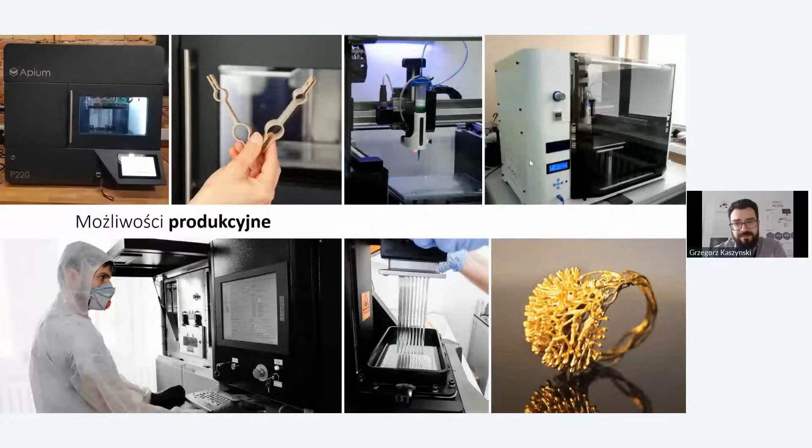You can visit us in Warsaw Cambridge Innovation Center to talk about prototyping and new technologies. And we are growing fast. Last year we were at 48th place in Deloitte Technology Fast 50 Central Europe. And our main job is to promote rapid prototyping, new technologies. We are in a lot of webinars, applications, and materials. We have our own production facilities. We have our own research team and development team.

And what is really important, we are not your standard sales company. Our backbone is research and development. We have different projects ranging from biotech to engineering to special materials, mostly around rapid prototyping. In total, we have more than 20 million zloty in fast-track projects currently running in our company.

We have our 3 main areas that are divided between Sygnis Biotechnologies, Sygnis New Technologies, and Sygnis Nanotechnologies. But what is really important for us is that it is one company. People are working together, exchanging ideas and helping each other. So we can use industrial applications from Sygnis New Technologies in Sygnis Biotechnologies and help our users in biology with solutions that we devised for industrial customers.

In biotech, we focus on 3D bioprinting. As I said, the core for us is additive technologies, microscopy, 3D tissue models, and omics. In nanotechnology, we go for ultra-high vacuum and nano fabrication with Femtika. Again, not only subtractive, but mostly additive technologies and solutions going down to hundreds of nanometers. And the main focus of the company, Sygnis New Technologies, is rapid prototyping and 3D design and engineering. We are working with several different technologies.

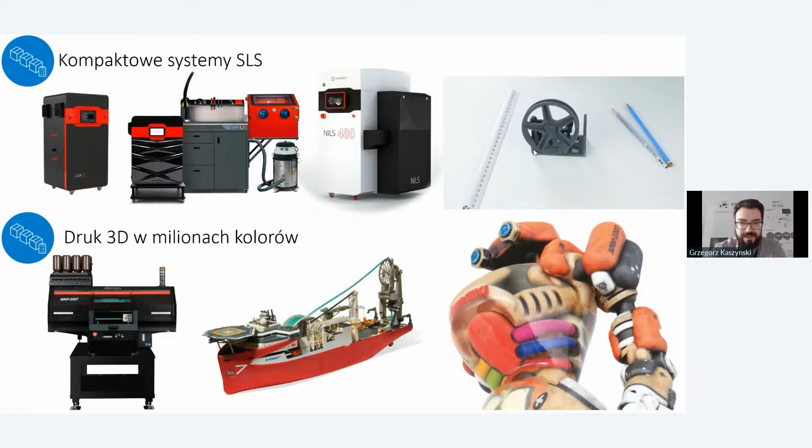Our pride is our national company, Sinterit; we are working with SLS techniques. And we are working also with a new player on the market, Mimaki. We can print engineering devices with Sinterit. We can print full color systems. This, what you can see on the screen, is from the printer. It is not painted.

We are working also with resin printers in different applications, from consumer versions to highly sophisticated industrial solutions from DWS. We are focusing on FDM from industrial applications, special materials, up to, for example, this is a very good example of cooperation, printing implants. So this is between industrial applications and biotech applications, but we are also working with customers to directly 3D print implants with PEEK materials.

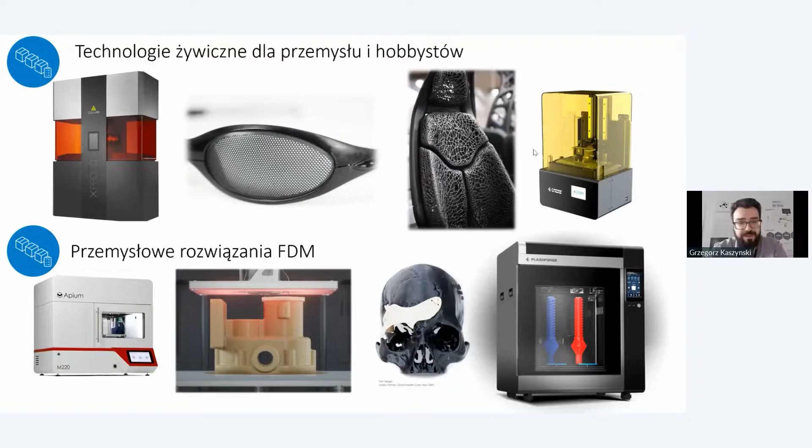Also, of course, we are working with metals, and in this area we are working with Aconity and InssTek. And from InssTek you will hear about their amazing technologies in a second. And of course, we are focusing on rapid prototyping and low volume, low scale production. So we have our own machines, our own designers, so we can prototype, produce, and help you with all techniques. Anything that can be rapid prototyped or 3D printed, we have it covered.

Today's topic is multi-material manufacturing. With technological advances, there's a growing demand to use materials in various ways and combinations. I would like to talk about the whole process of applying multi-material manufacturing to the industrial environment, from material research to practical applications.

As you can see, I've divided my presentation into 5 parts. The first 2 parts are about DED technology, which is one of the 3D printing technologies, and how it can be applied to material research. The later 3 parts will focus on processes that we need to apply this research to actual industry. After that, we will cover examples of multi-material manufacturing applications for each industry.

Before we get into it, let me introduce our company, InssTek. InssTek was incorporated in 2001 and specialized in metal 3D printing business using the DED method. We are a technology-based company and have our own technologies in various fields, from hardware to software, such as powder feeding, optic design, and 5-axis CAM.

We are based in the middle area of South Korea with 45 employees. We specialize in manufacturing AM machines and AM service, such as printing, coating, cladding, and repairing. We are working with many global partners and customers in Europe, America, and Asia.

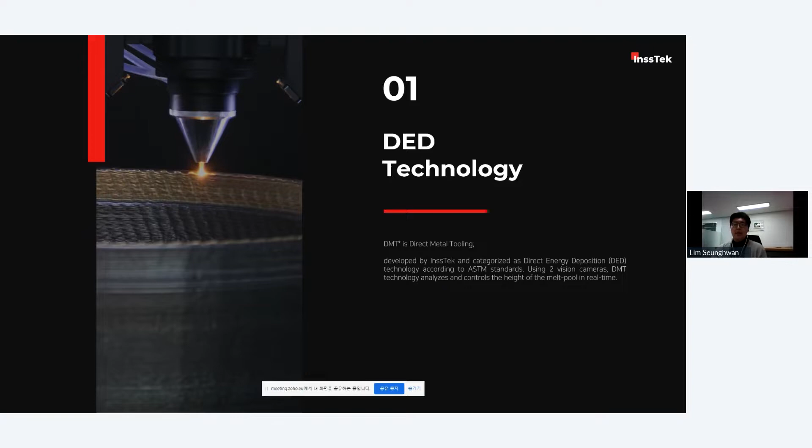First, I will introduce DED technology, which is one of the 3D printing methods. After that, we will look at the many advantages of DED technology. DED stands for directed energy deposition and is a 3D printing method that uses an energy source to make a pool of molten metal. To this molten metal pool, feedstocks are supplied and solidified as one part.

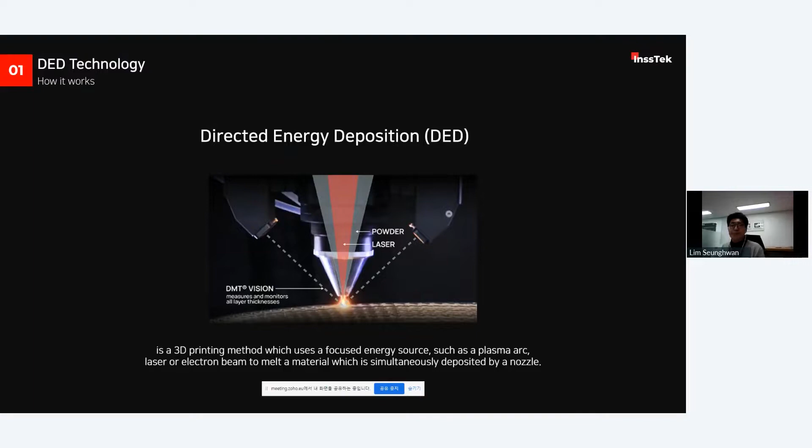DED technology can be classified according to the type of energy source and feedstock. Metal feedstocks are used in forms of powder or wire, and as energy sources, laser beam, electron beam, plasma, arc, and sometimes kinetic energies are available. So there are many companies serving DED technology with various combinations of feedstocks and energy sources.

Among them, InssTek uses a combination of metal powder and laser beam. As you can see in the picture on the left side, laser and powder are focused to one point through the nozzle, and two vision systems watch the melt pool and control the process parameters for better quality.

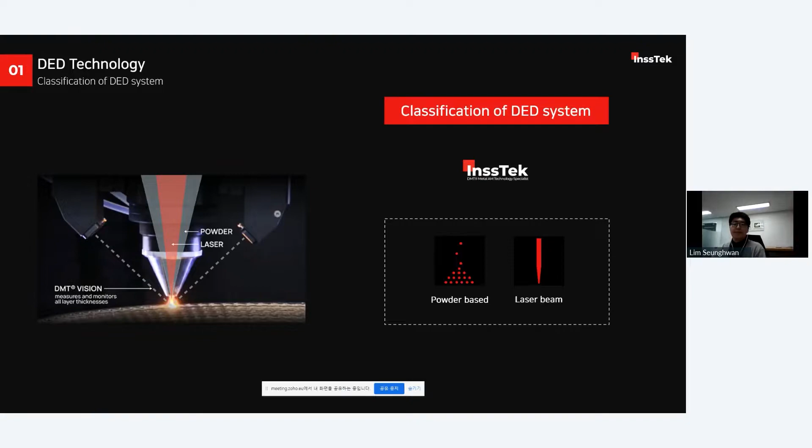Besides the DED method, there are many different metal 3D printing systems. As you all know, powder bed fusion, binder jetting, and material extrusion are representative ones. To briefly summarize, powder bed fusion is a method that applies heat sources to particles contained within a powder bed, which gradually indexes down as each layer is completed and new powder is spread over the build area.

Binder jetting is similar to powder bed fusion. It uses a thin layer of powder, but it uses a special material called binder to bind the powder. After binding the parts, they do sintering to make it metal. The material extrusion method melts wire-shaped metal with heat and solidifies it to make shapes.

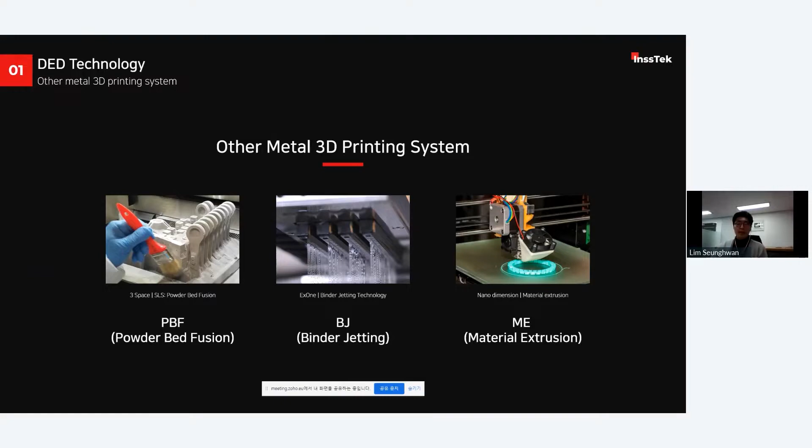Metal 3D printing can be delivered in various ways like this, so it is important to understand the characteristics of each process. With this understanding, users can make good use of it. Today, we will focus on DED methods, advantages, and possible applications. DED has many advantages differentiated from other methods. I will talk about four main advantages: scalability, add-up, mechanical properties, and multi-material.

The first one is scalability. Unlike powder bed fusion and binder jet methods, the DED method doesn't need a powder layer. It has a movable printing module that applies material and energy sources to the target point. Thus, its printing volume can be expanded to a comparatively large size. And also, if you use a larger beam size, printing speed is dramatically increased. Large beam size can contribute to this scalability.

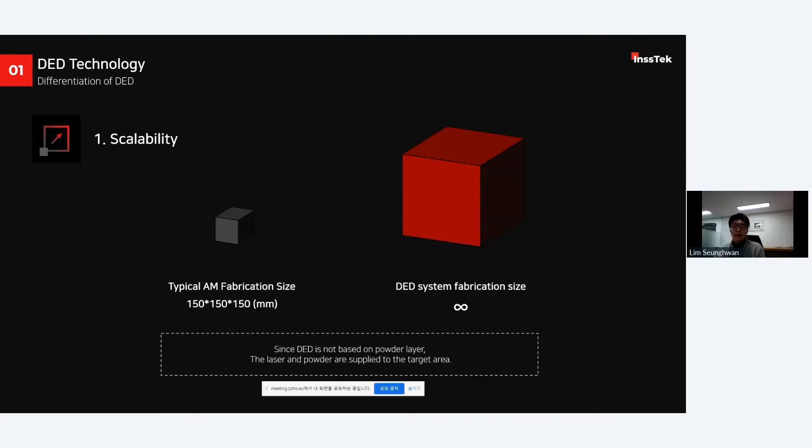Also, the DED method and robot arms are a good match. Robot arms can control the motion of the printing module with a high degree of freedom and wide working range. This feature is especially competitive in industries that need large-sized parts. Of course, if you use multiple robot arms, productivity can be increased.

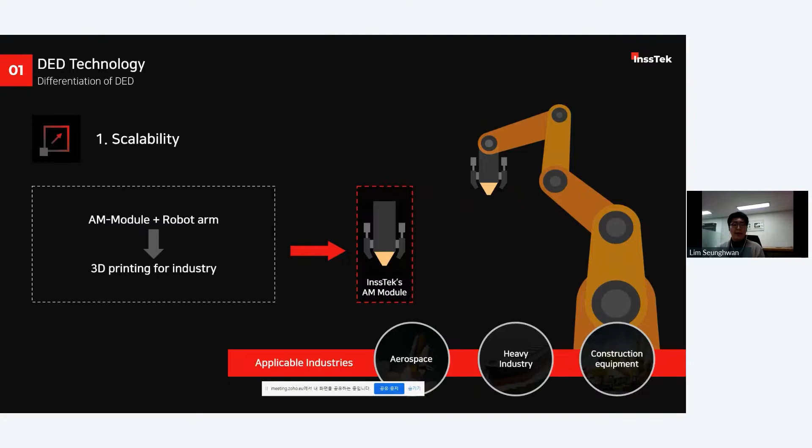The second advantage is add-up. For many 3D printing methods that use a metal powder layer, it is general to start printing with empty space to make a qualitative layer. On the other hand, the DED method has few restrictions on substrate status and is capable of adding up on an existing part as well as making a new part. Thus, DED is suitable for various processes such as repairing, remodeling, coating, and cladding. Since it can be used with other manufacturing processes, metal manufacturing processes that were previously impossible can be done.

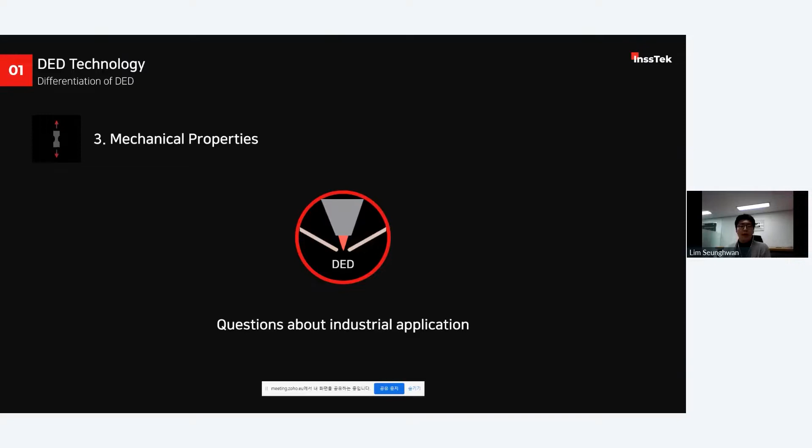The third advantage is mechanical properties. I've heard some questions about the applicability of 3D printed metal parts to real industry. But much research has shown that the mechanical properties of the results produced by the DED method are similar to those of existing manufacturing methods such as casting and forging. And some of them show better results depending on the material.

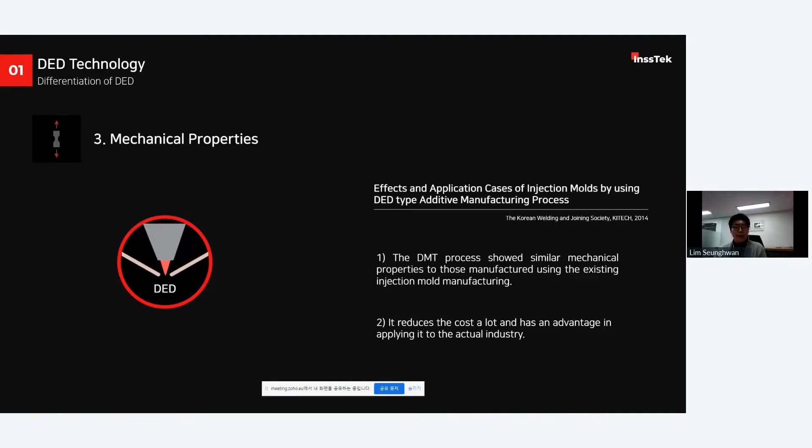These features are about some defects. During printing, process parameters should be controlled precisely so as not to damage mechanical properties or generate cracks and defects. If the process parameters are not optimized, defects like these can occur. InssTek has standard process parameters for more than 20 types of materials that are most common in industry, such as iron, nickel, and titanium. When working with the standard process, the internal density is excellent at 99.8% or more.

InssTek has standard process recipes for more than 20 types of alloys shown in the table. Various alloys such as titanium, steel, nickel, copper, and cobalt are available.

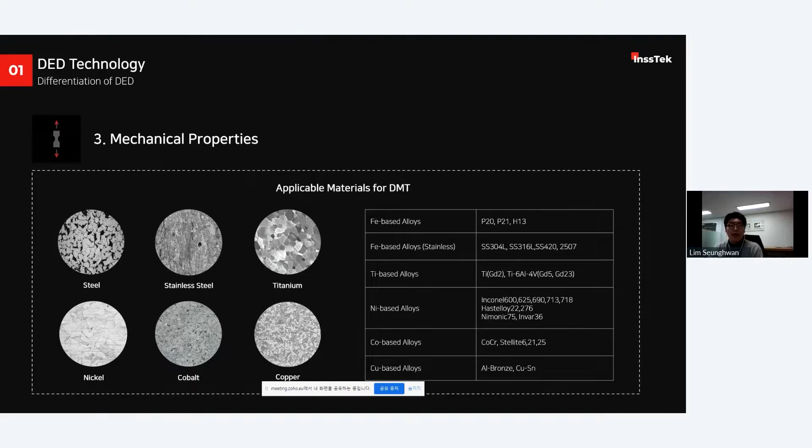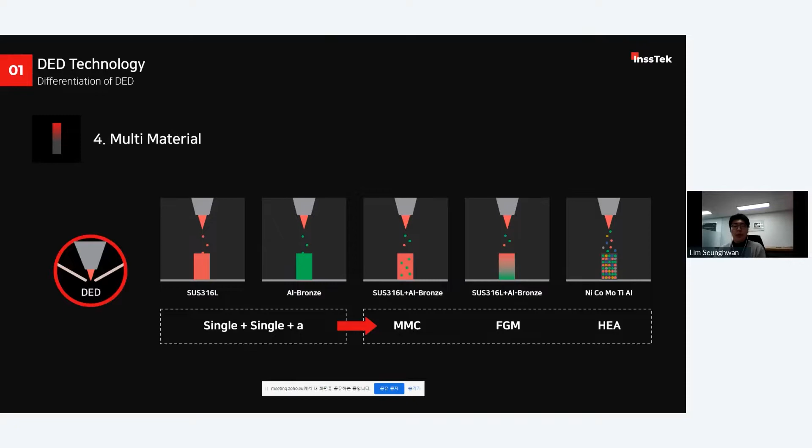The last feature is multi-material. Since the process is performed by continuously supplying metal powder to the molten pool, if the metal powder is changed during supply, several different materials can be stacked partially in one process. With this feature, multi-materials can be used in various ways, such as bonding of dissimilar materials or gradient materials. It is DED method's own advantage that is not available with other 3D printing methods. It is impossible to control the composition of the material in the shape of wire or powder layer.

In this way, new types of materials can be manufactured. The sample in this picture is an example of a gradient material. It is composed of Al-bronze, which is a copper-based alloy, and T800, which is a cobalt-based alloy. Al-bronze has a yellow color, so we can see the content of Al-bronze is changing gradually as the gradient color changes. It is impossible to make these kinds of materials with the existing process.

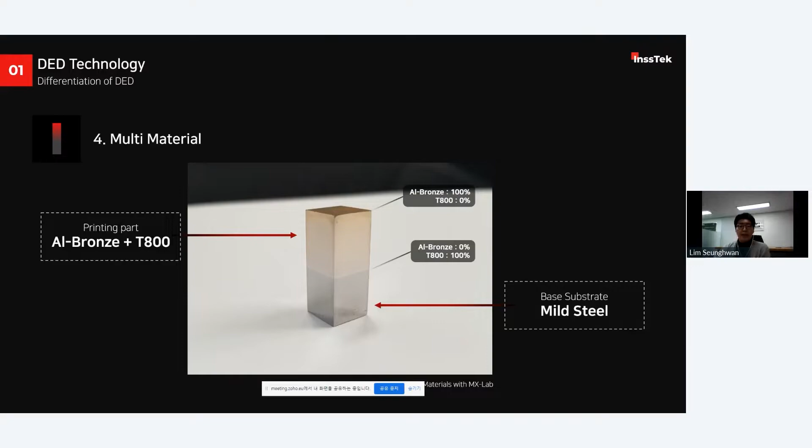Using multi-material will have a lot of importance in future industry. InssTek is developing leading technology in the field with DED technology. In this chapter, we will cover a new material research method. The new method operates with DED technology, which has strong potential in multi-material handling.

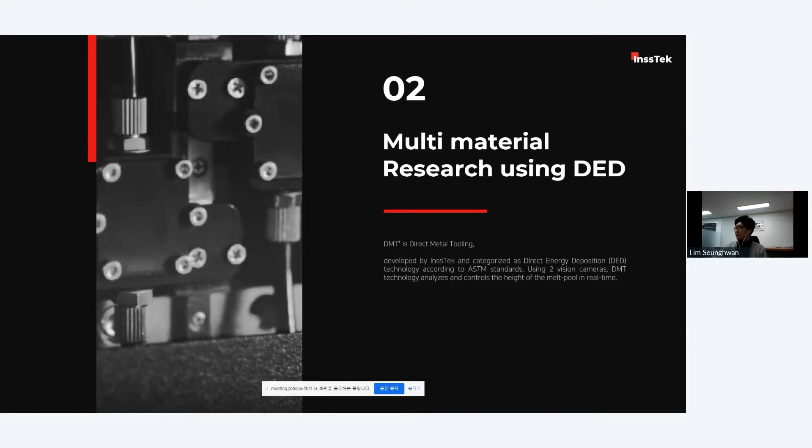The conventional material research method is too long and has many steps to make one specimen. Researchers follow the long steps to make molten alloys with the designed composition. After cooling the molten metals, they machine and analyze the specimen. But if you make a specimen with the new method, it's very simple. Just 3D printing, machining, and analyzing.

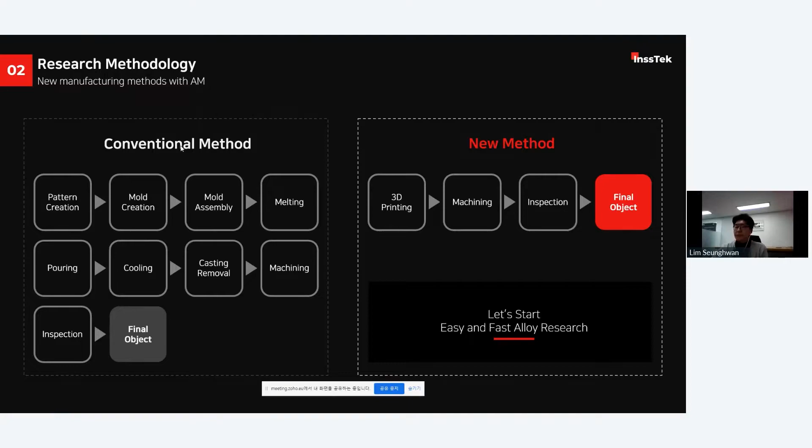Comparing the two methods, the new method is simple, fast, and easy to test various compositions. Thus, it is possible to restart the experiment quickly when tests fail. And if you make a specimen with a 3D printer, it is a safe process due to the closed environment. I think many of you are unfamiliar with this new method. For your understanding, I prepared some research papers tested with DED technology. Let's study it together.

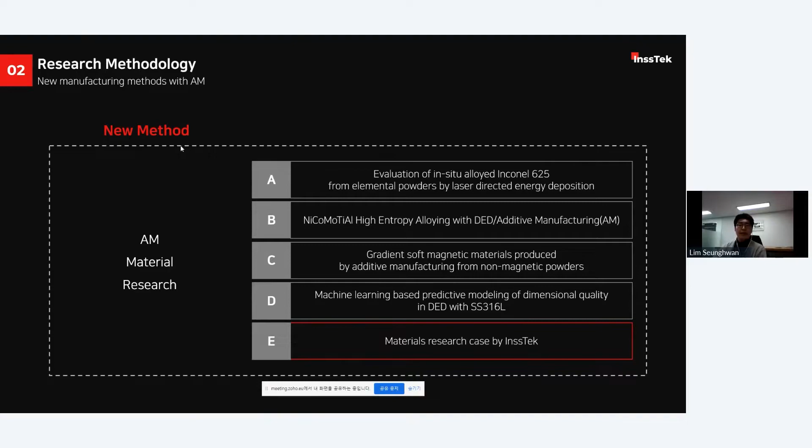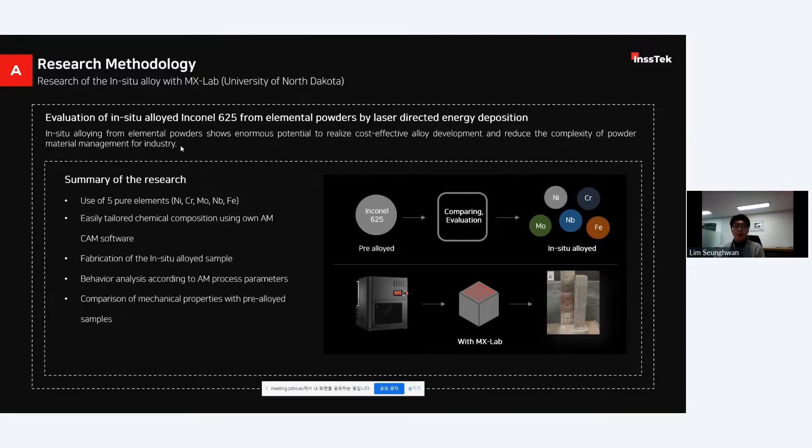This paper is written by Professor Yachao Wang from North Dakota University. This paper is for evaluating in-situ alloying effectiveness. In this study, samples made of Inconel alloy were compared with samples in-situ alloyed from nickel, chrome, molybdenum, niobium, and iron pure element powders, prepared with the same composition as the Inconel alloy. Finally, they found similar mechanical properties in the two samples, which means in-situ alloying can be a new alloy research method.

The third paper is written from a Russian university. This research was about functionally gradient material. FGM is a new alloy made by mixing 2 different materials with gradual composition change. Al-bronze and stainless steel 316 were used for the research. These two materials are non-magnetic powders, but the FGM produced from the two materials shows soft magnetic properties. Changing material composition layer by layer is impossible with the conventional method. DED is the only method to make this type of material.

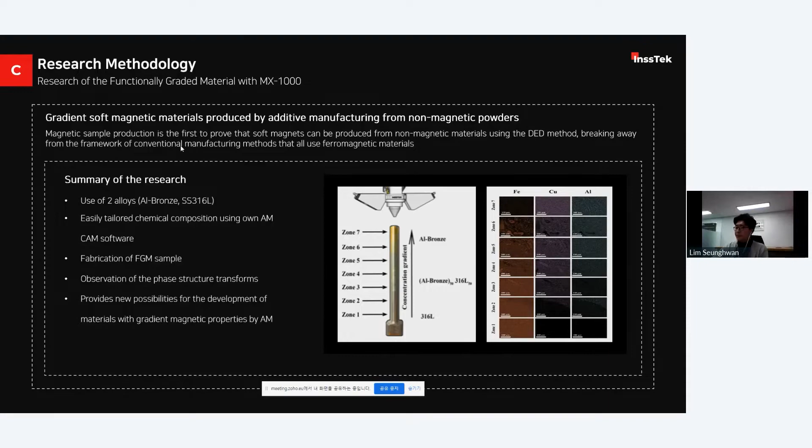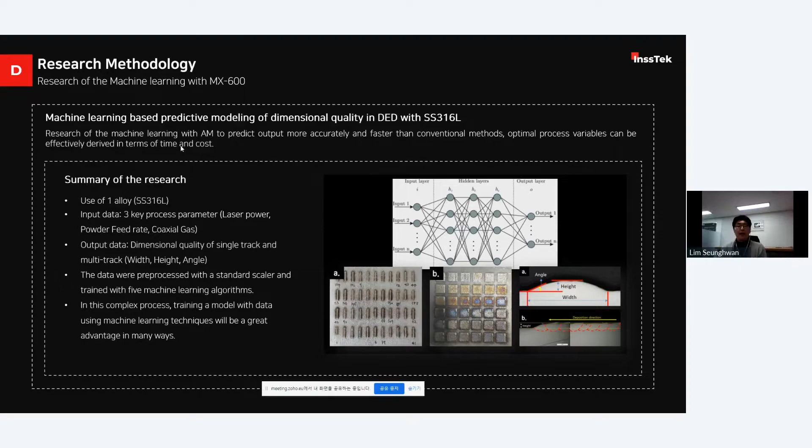The fourth paper is probably an unfamiliar form of study. This study is related to the DED manufacturing process. Machine learning was conducted by combining the resulting data and various process parameters. This is a study to find optimal process parameters by predicting process quality through machine learning. It utilizes the fact that experiments can be quickly conducted under various conditions. In this way, a new field of research was created by linking software technology and material research.

In addition, InssTek verified multi-material related papers such as high-entropy alloys, metal matrix composites, and functionally gradient materials with the MX-Lab system, and confirmed that the material research methodology using DED could replace the conventional method.

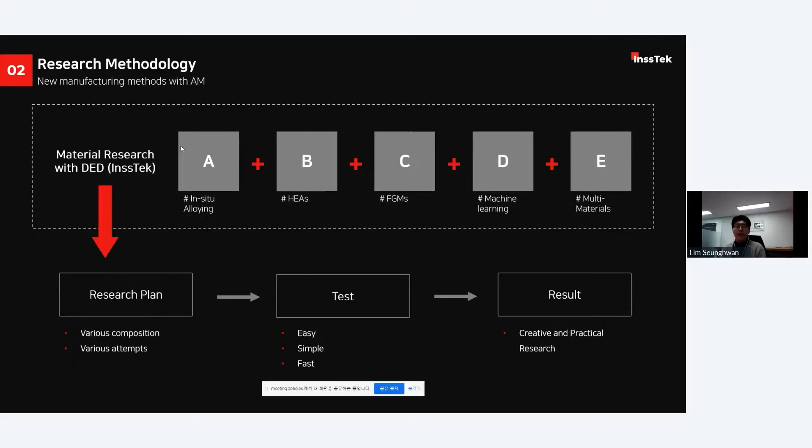Now, I will explain how to construct an experimental environment for material research using DED. When building a research environment using DED technology, three major technologies are key: powder supply technology, optic module, and software.

The first core technology is powder supply technology. Key factors are how precisely powder can be supplied, how small amounts of powder can be supplied, and how various powders can be supplied at once using multiple feeders.

The second core technology is the optic module. Using an industrial purpose optic module, high power lasers are used and specimens become bulky. Therefore, an optic module made in a size suitable for the research environment is needed. Additionally, a melt-pool monitoring system will support the collection of experimental data.

The third core technology is software. In general, several softwares must be used to handle metal 3D printers. 3D modeling of specimen is produced with software called CAD, and the CAM program calculates and simulates the path through which the machine moves. All of them are softwares that require studying hard because their functions are complicated. Therefore, there is a need for software that can simplify design of specimens and form alloys.

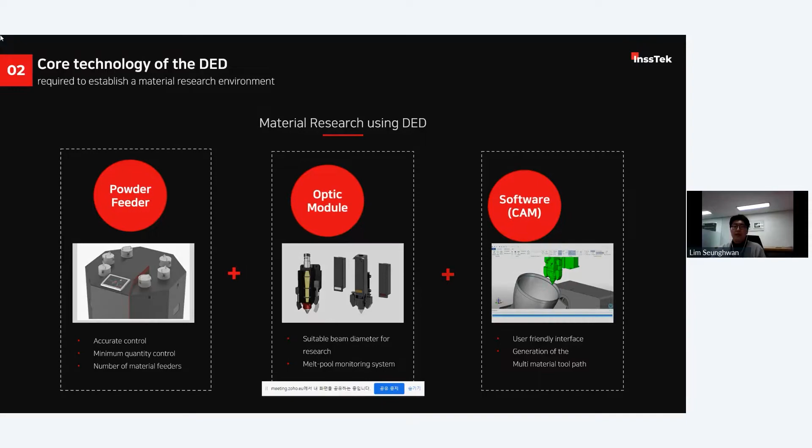Based on three core technologies, by combining the moving stage and laser systems, a research environment with DED technology can be established. However, InssTek launched an all-in-one material research machine, which includes these five components. I will briefly introduce this innovative machine, MX Lab.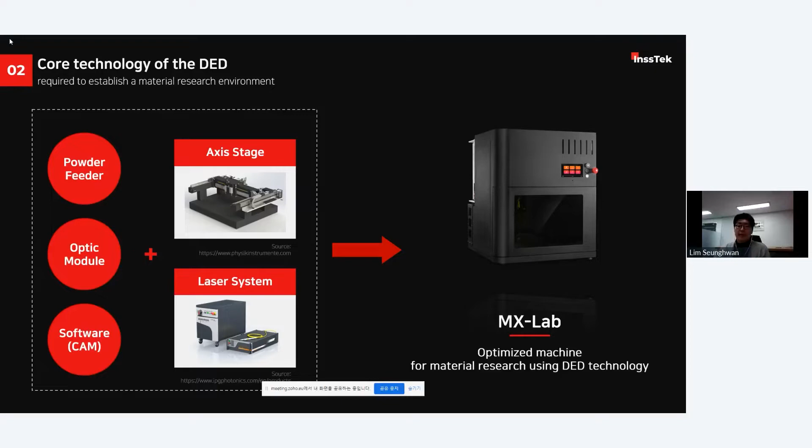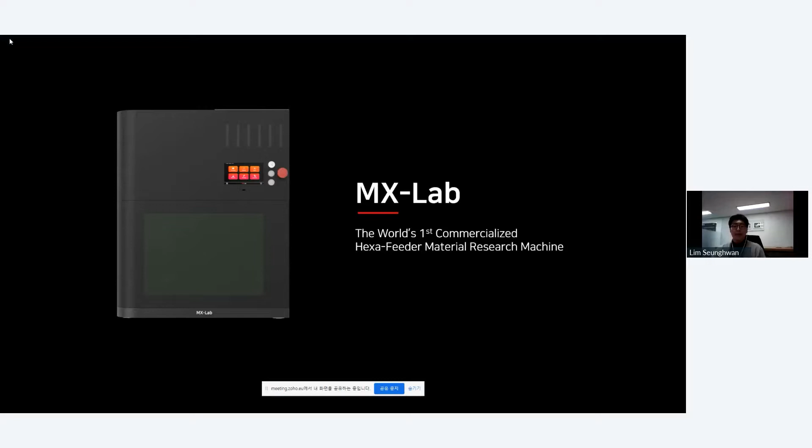MX Lab is the world's first material research machine with a hexafeeder. The machine includes a 500-watt laser, 6 powder feeders, optic modules, and mechanical stages inside.

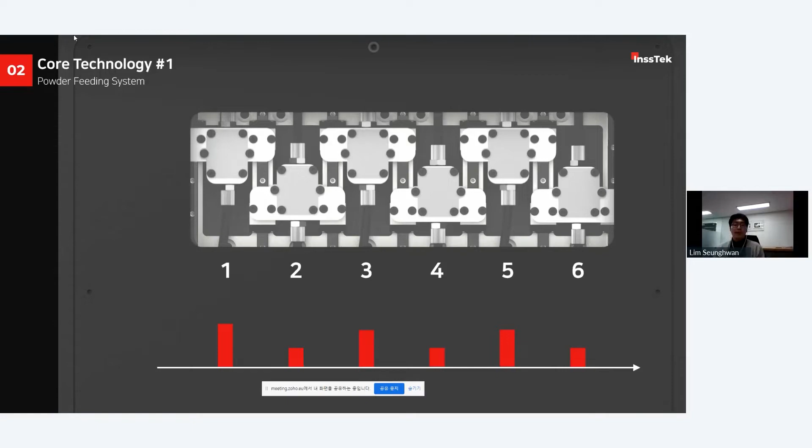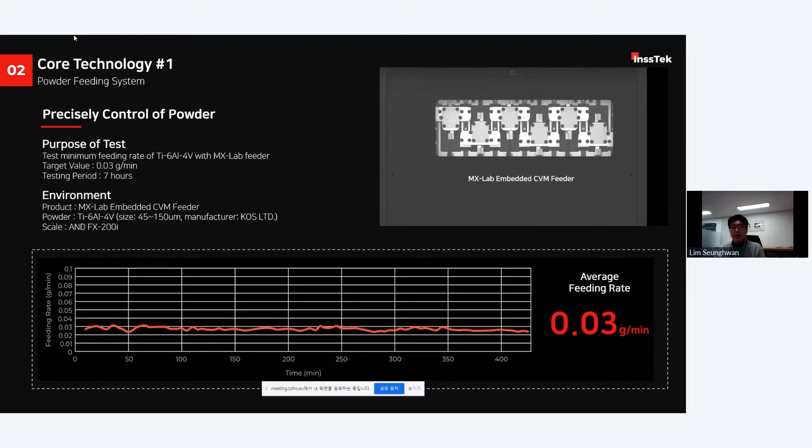As I explained before, accurate control and minimum quantity control is important for material research. The powder feeder in MX Lab shows excellent capabilities for these two criteria. As shown in the graph at the bottom, powder is stably supplied for more than 7 hours. Also, a very little amount of powder, 0.03 grams per minute based on Ti64, can be supplied.

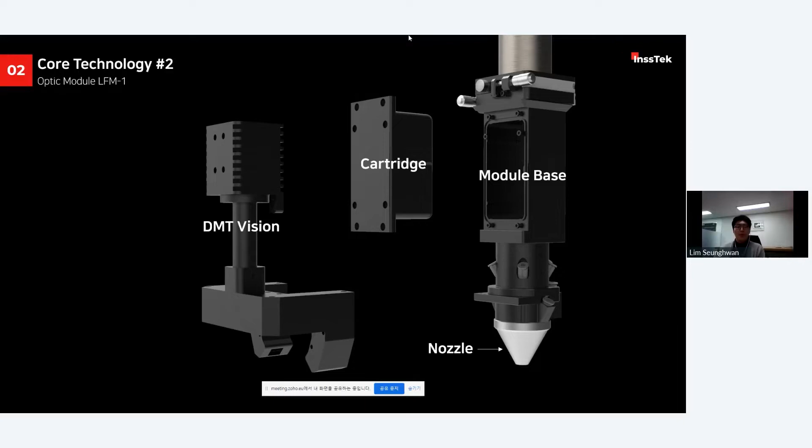Next feature is the optic module. The optic module includes an optic cartridge, nozzles, and vision systems for multiple monitoring. MX Lab's optic module can generate a 400 micrometer beam diameter. This size is efficient for conducting material research. With this size of beam, 10 millimeter cubic samples can be made in 30 minutes. Maximum printing volume of MX Lab is 150 millimeter cubic, and many data can be collected with multiple monitoring systems.

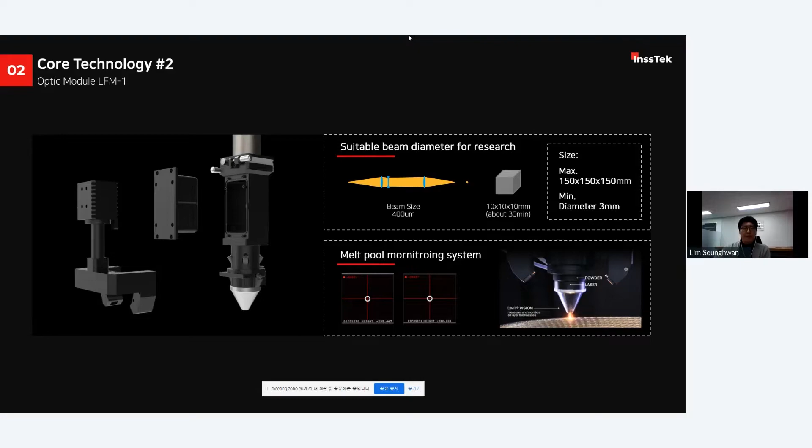Also, there is special software named Material Designer to support designing specimens. With this software, researchers just select specimen shape, size, compositions by layer, and process parameters to design a specimen. They don't need to study other software like CAD and CAM to handle the 3D printer.

There are more functions to support research. Auto Z is for maintaining the heat input. It controls the gap between specimen and nozzle constantly. Next, researchers can change the laser power easily, thus they can experiment with various conditions.

Also in the system, it is easy to extract many data made and collected during the process. Researchers can use this data for their analysis.

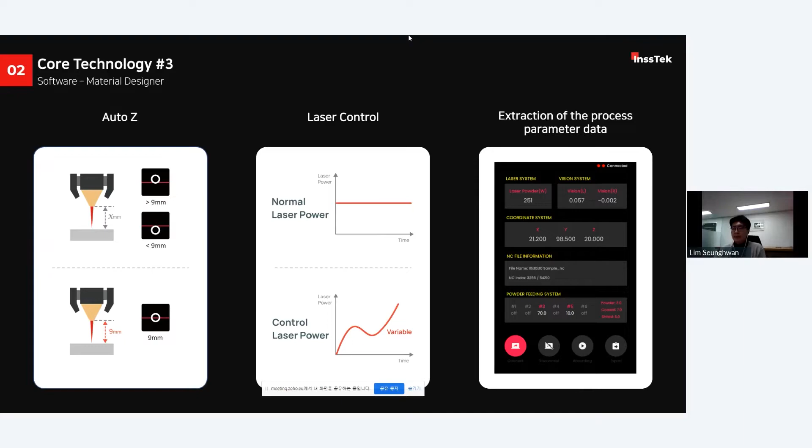In this chapter, we will experience material research using MX Lab together. The material research process using MX Lab is as follows: design the specimen with the composition to be experimented with in the software named Material Designer.

Set the metal powder to be used for the equipment and proceed with 3D printing. After that, analyze the specimen. This is the whole process for one experiment, and this process can be done in an hour.

Now, I will show the entire process through the video. The video to be played can also be found on InssTek's YouTube. The video is about researching high entropy alloy by changing the composition of powder.

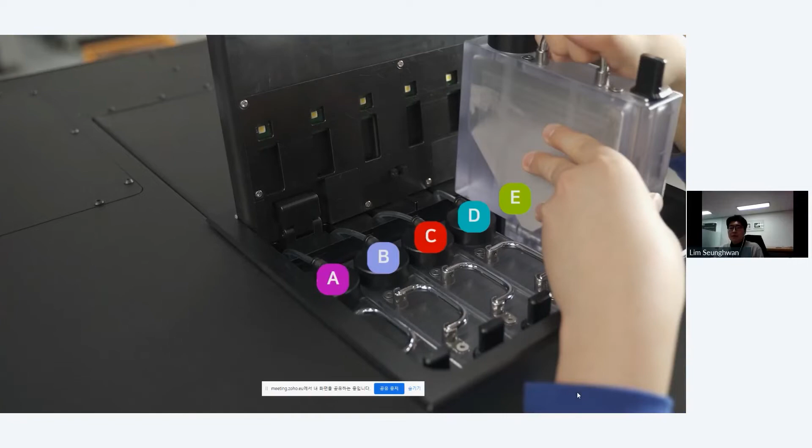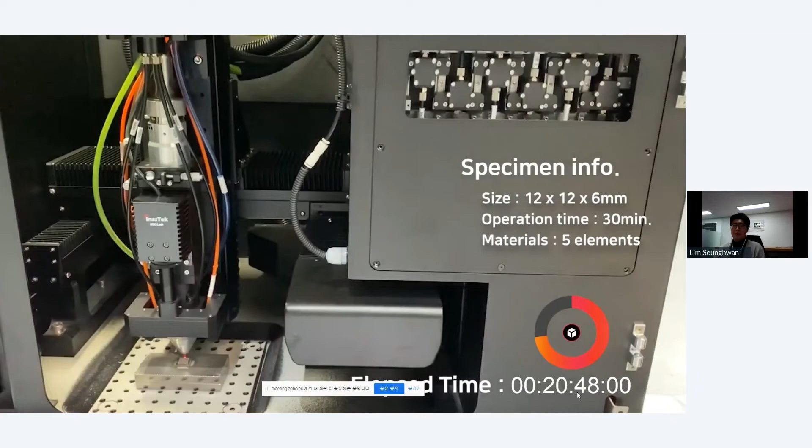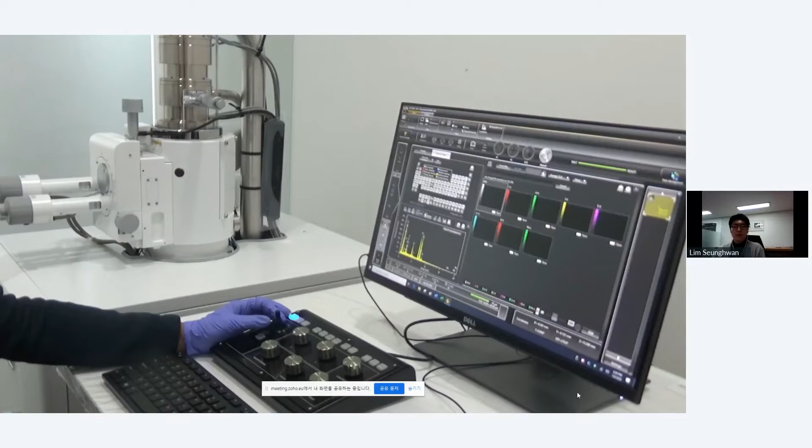You can see in the video, 5 feeders are independently working. As you can see in the picture, 5 elements are very well mixed. Now you can understand how powerful material research using DED is.

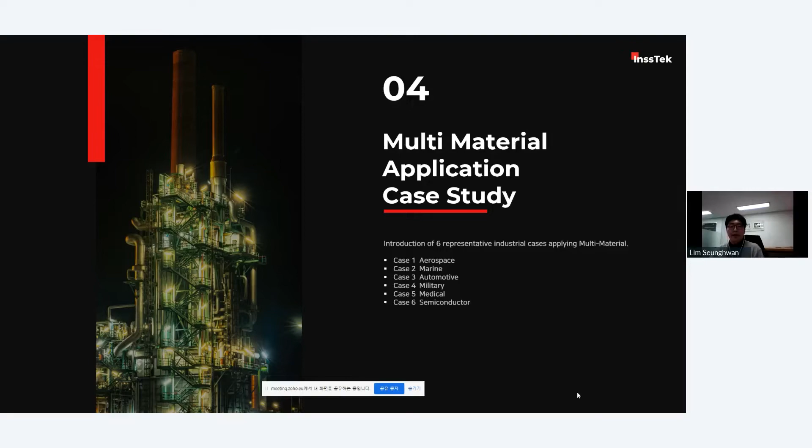In this chapter, we will look at how multi-materials are applied to the actual industrial sector by case studies. I will introduce 6 industries: aerospace, heavy industry, automotive, manufacturing, medical, and semiconductor. These are all success stories that InssTek has achieved collaborating with its customers.

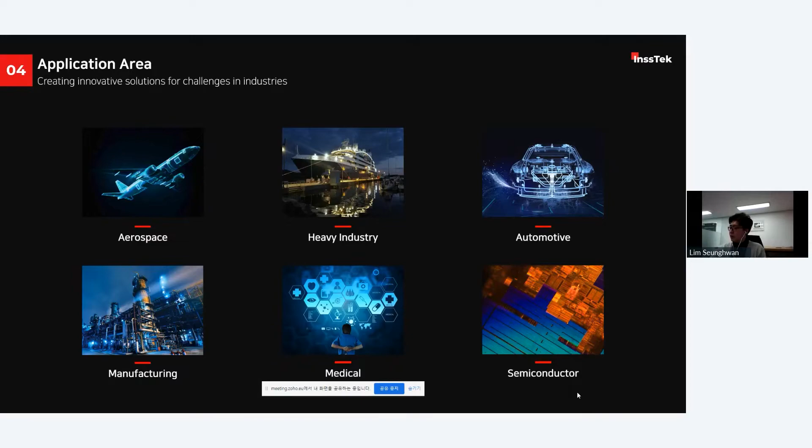First industry is aerospace. InssTek did lots of projects in aerospace field. These 3 cases are representative: we manufacture rocket nozzle with multi-materials, and we did repairing compressor blade and jet engine air seal.

I will explain more about the rocket nozzle project. The shape and size of rocket nozzle is actual scale for real use. Inside of the rocket nozzle, a cooling channel for thermal control exists. We use 3 different materials in this project: nickel-based alloy, Nimonic 75 and Inconel 718, and copper-based alloy, bronze.

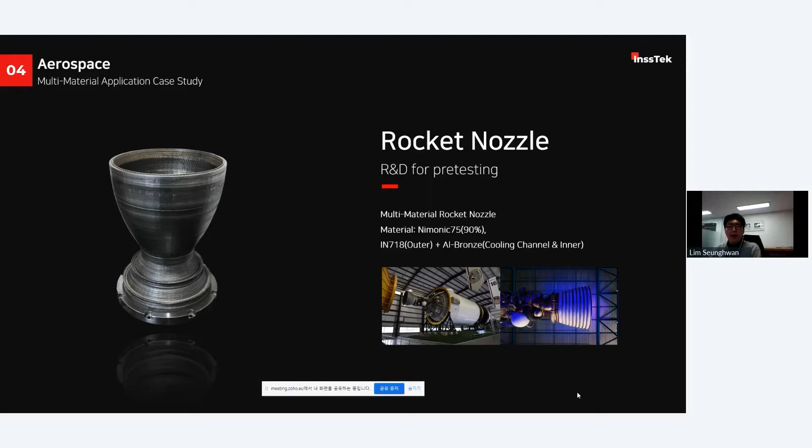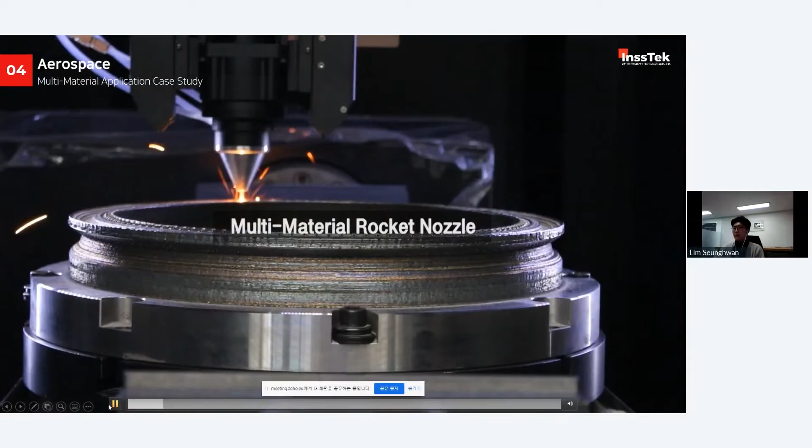This video is about how we make the rocket nozzle. This big size of rocket nozzle is made in 180 hours.

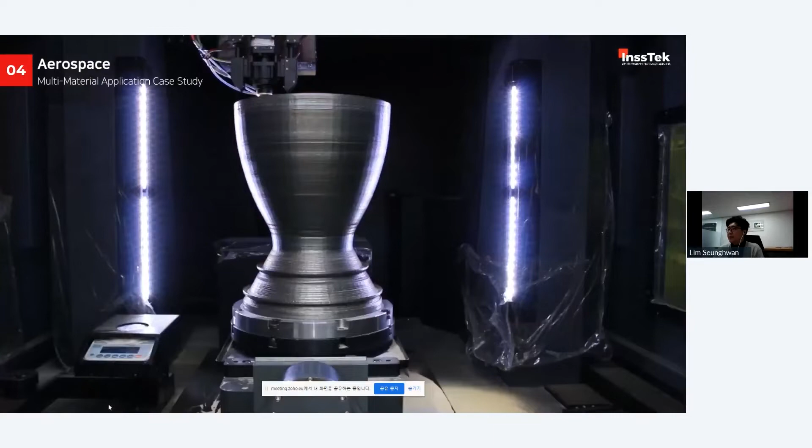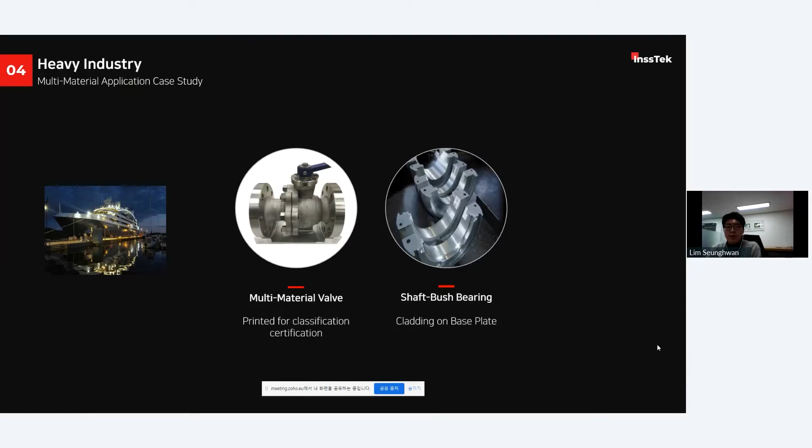The red region is vulnerable to corrosion due to direct contact with seawater, so we made it with Inconel alloy, which has high corrosion resistance. The outer gray region is made with stainless steel, which is easy to machine. This project was proceeded with a consortium of 7 companies. Finally, we received certification from the Norwegian certification company, DNVGL.

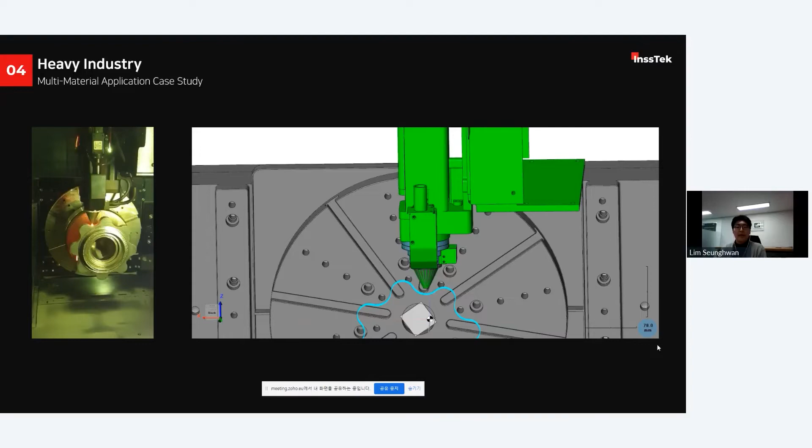This video is about how we manufacture the multi-material valve. InssTek conducts simulation on its own CAM software to verify the possibility of collision, and then proceeds with 3D printing.

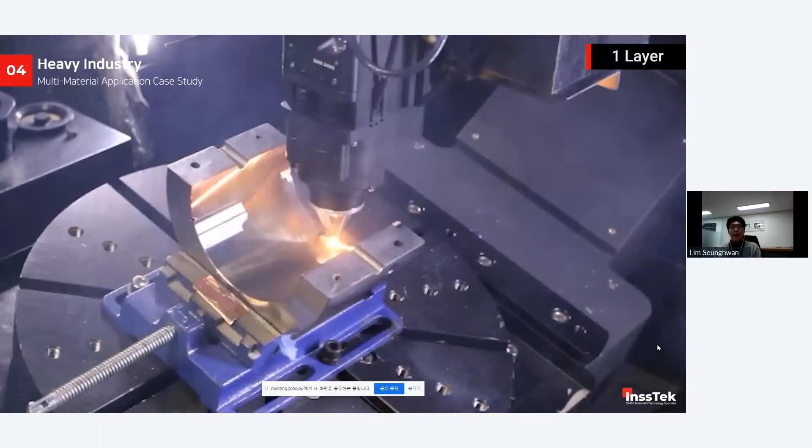This video is about cladding on the shaft bush bearing. We cladded with white metal on a carbon steel base. You can see the whole process is done automatically.

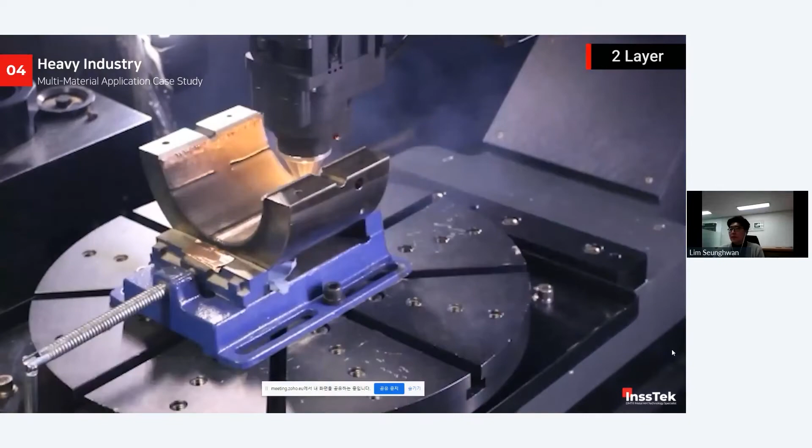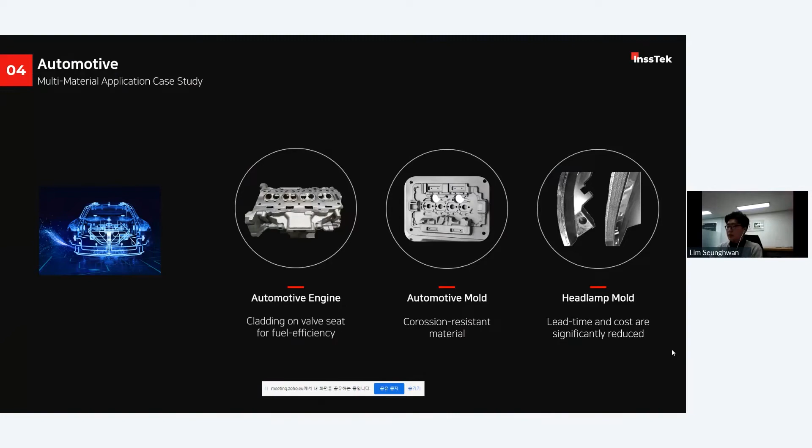Third industry is automotive. In this field, we did cladding on automotive engines and repairing molds for automotive parts. In case of valve seat cladding in automotive engine, copper-based alloy was cladded on a base made of aluminum. As a result, we improved fuel efficiency by about 2% in absolute terms.

This video is about how we do cladding on the valve seat in automotive engine parts.

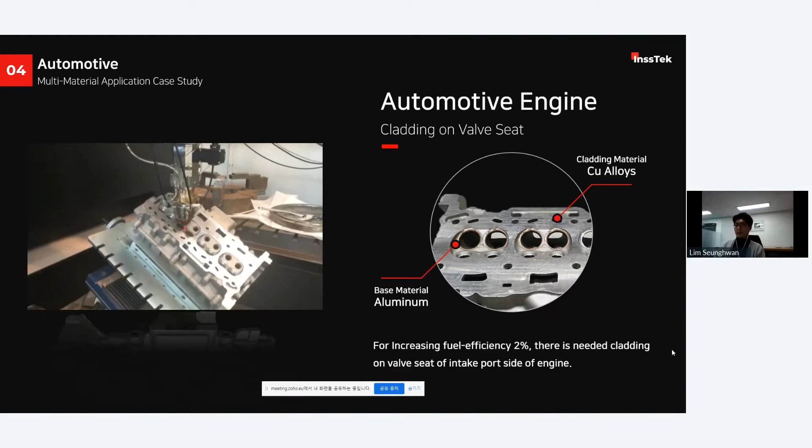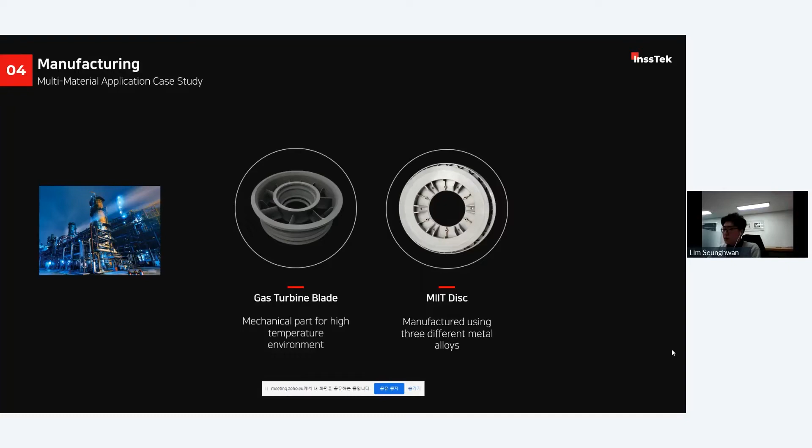Next industry is medical. We adapted our multi-material DED technology to artificial joints. There are three types of artificial joints: cup component for the hip system, and tibial component and femoral component for the knee systems.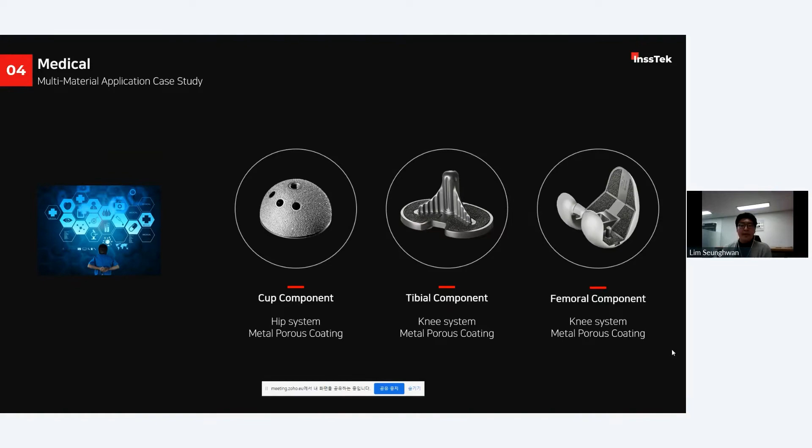Porous coating technology is a technology that makes the smooth surface of the artificial joint rough. We do porous coating with pure titanium powder, which is a biocompatible material. With this material, bone grows inside the coated surface. Thus, we don't need chemical bonds to attach bone and artificial joints. This technology is in clinical trial stage, and more than hundreds of cases are now being tested.

And there is a knee implant called femoral, which is made with cobalt chrome. InssTek succeeded in bonding pure titanium on cobalt chrome for the world first.

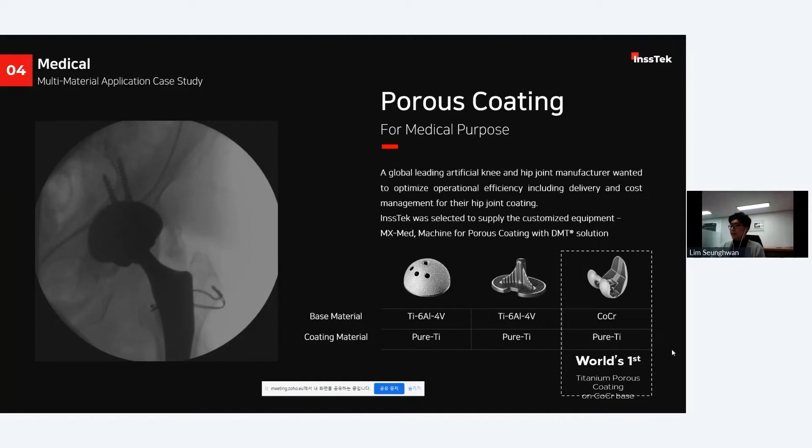This video is about how we do porous coating on artificial joints.

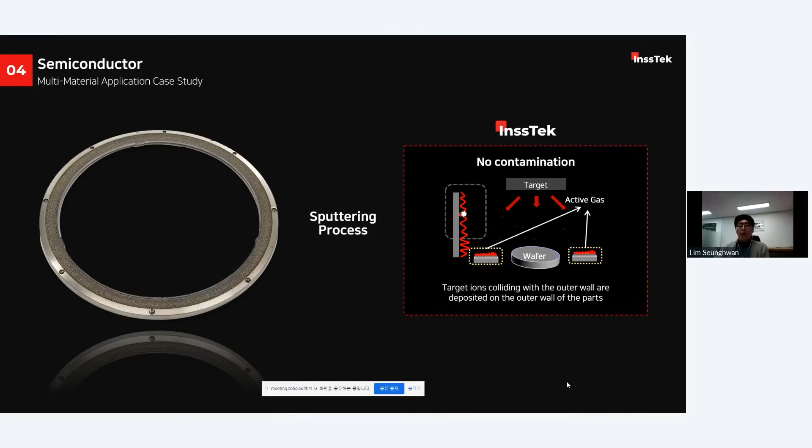Porous coating technology can also be used in the semiconductor industry. The picture on the left side is a deposition ring, which is a core part in semiconductor producing machines. During the semiconductor producing process, ions can be popped into vapor, and this causes defects. Traditionally, arc coating was used in the deposition ring, but our porous coating shows better bonding properties. Now our customer is testing this porous coated deposition ring in real processes.

As you can see in the previous chapter, multi-material is already widely used in the real field. Now I will conclude this seminar with a summary.

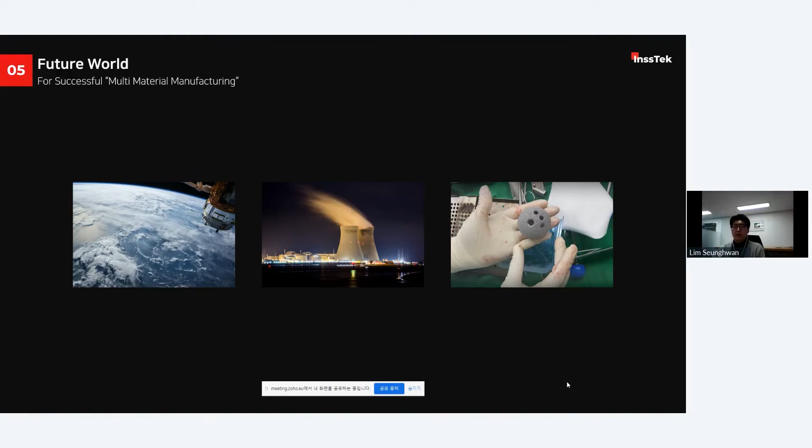Expansion into space, development of the energy industry, and dissemination of artificial joints. As technology advances, the demand for parts used in extreme environments will gradually increase. Materials used in extreme environments are difficult to manufacture with existing metal manufacturing processes, and there will be many new alloys to be studied according to the field's requirements.

In the future, the world will need new alloys and new combinations of materials to overcome extreme environments. Thus, we think multi-material manufacturing will be an important keyword. Successful multi-material manufacturing, material research, and industrial application must be closer and move as one process.

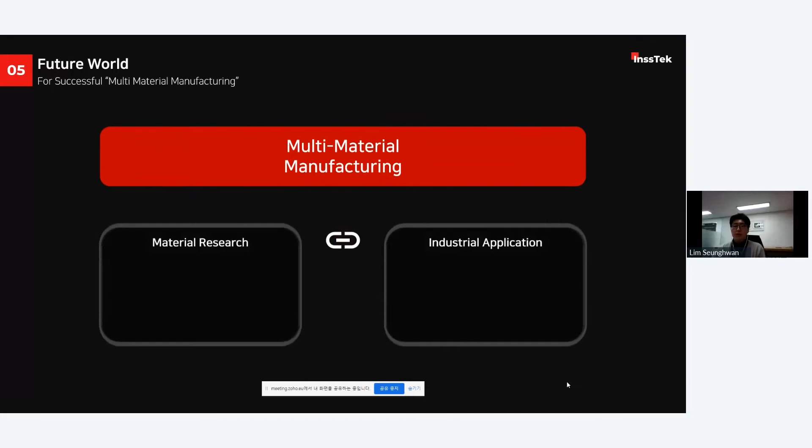It works for expanding multi-material manufacturing. So we made a machine for material research, MX Lab, and industrial machines MX Fab and MX Med.

After all, material research is DED. Researchers try to make materials with suitable properties for industrial applications. DED is the only method for material research with changing the alloy composition. InssTek wants to pioneer this field with material research experts here.

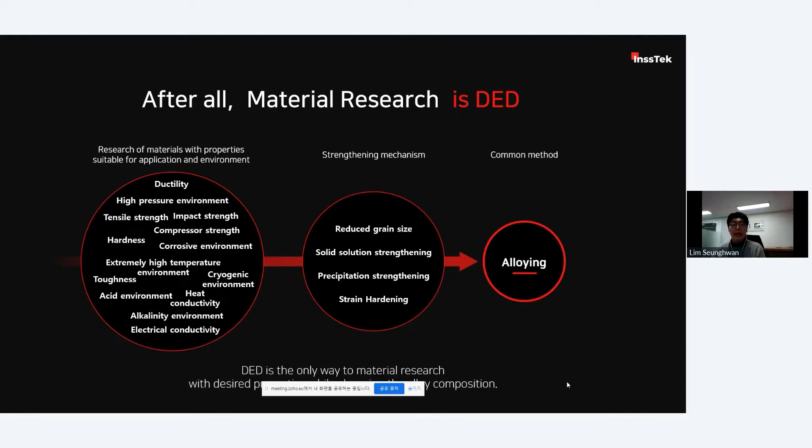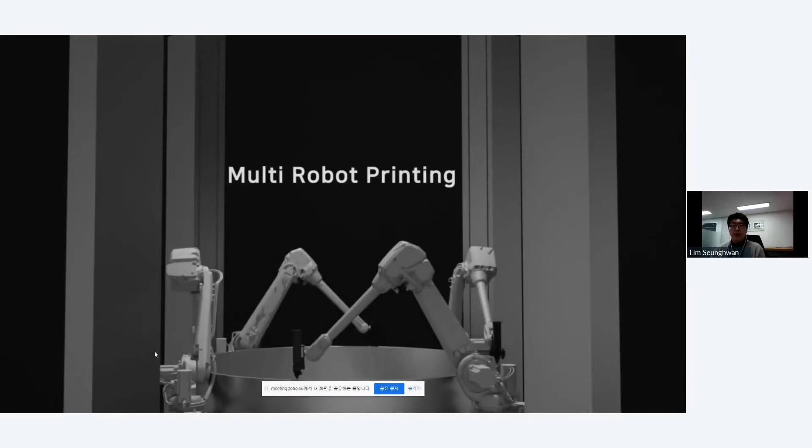Finally, I will end the presentation by showing a brief teaser video. The teaser video is the future plan of InssTek. InssTek wants to stably manufacture such super large outputs based on material research.